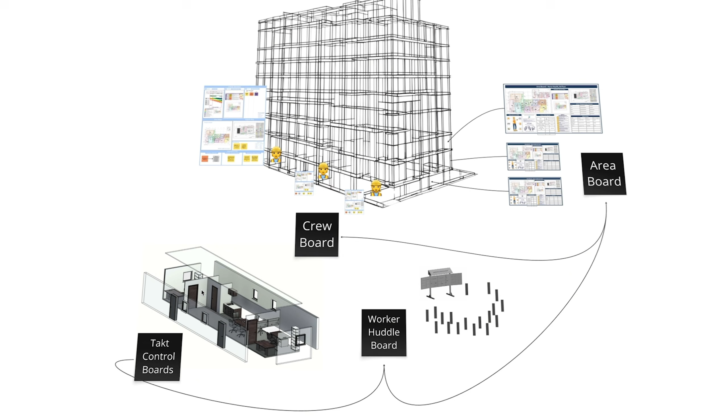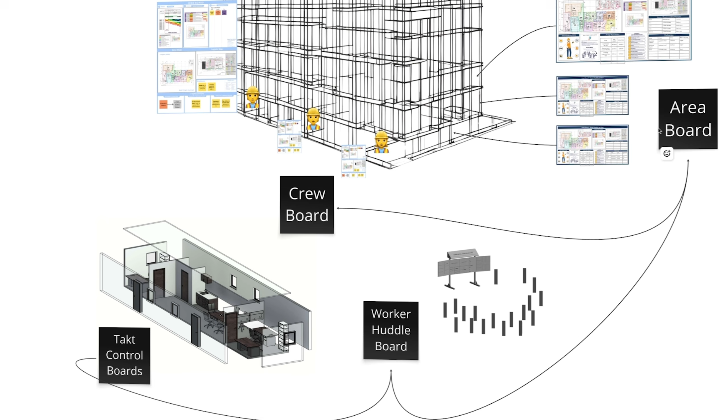But the bottom line is you will do your weekly team meeting, your strategic planning and procurement meeting, and then your trade partner weekly tactical right over here inside the office, and then the afternoon foreman huddle in the office. Then when you go to the morning worker huddle, you're out in the field, and then area boards communicate any information that you want to for that specific area, and then crew boards are for the crew. So I just want to make sure that everybody's still placed in the right meeting structure there and that we know what we're doing.

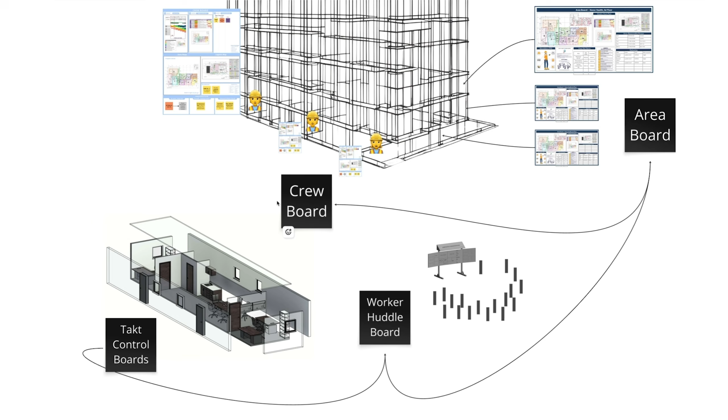The cool thing that I want to show you now is how the conference room is set up for that. And I don't like the single wide trailers. I hope we have at least a double wide or larger. But it does fit into single wide trailers, and we can help you out with that if you ever need it. But the bottom line is, for the conference room layout, I love to have on the left wall the part 1 coverage, team, and focus boards.

And then to have the part 2 flow and weekly work plan deliveries board. Then in the front to have your discuss and solve boards and your 2 screens up front. And then over here to the right, you can have your board, your pull planning area, and your agendas. And you'll see over here, we have the Trade Partner Weekly Tactical Agenda, just like I showed you before. But the bottom line here is you are going to use this in a very specific way. And actually, I'll go ahead and use this as a guide for us before I actually show you the Minecraft portion of it.

As we've talked about before and in other works, your Team Weekly Tactical will be where you balance and build the team. Then your Strategic Planning and Procurement meeting, that's where you're going to be reviewing your macro level takt plan and making sure your procurement is aligned. And just an FYI, the InTakt application now has a procurement log for you to do that. And we're in the Trade Partner Weekly Tactical, where we're going to make sure that we have a weekly work plan and look ahead planning out ahead.

And so this will enable us then to go do the foreman daily huddle where we're planning every day, and then will give us the ability to communicate to the workers in the morning worker huddle. So that's really crucial for me to make sure that we have the right cadence and that we're flowing the right things in the right order all the way to the foreman and to the crews.

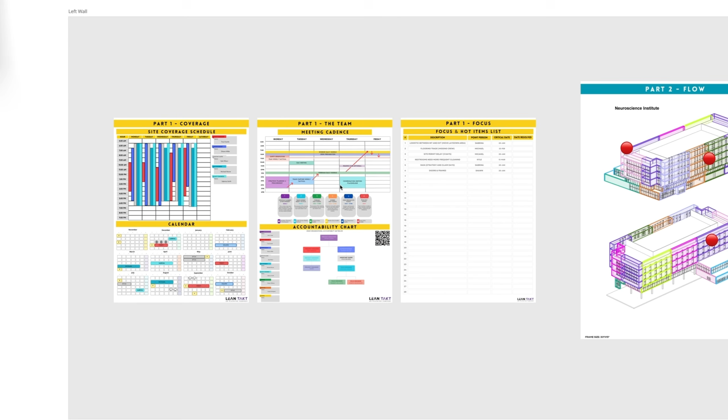And what you'll do here as a part of the meeting, just like we talked about before, is before the meeting even starts, you'll come over here to your boards to the left. If you've already planned your team for the week, you'll have your trade partners, your foremen, or you'll ask them nicely to put up red magnets on the boards for any problems that they're experiencing, any roadblocks. And these roadblocks will become the bulk of your agenda. You're going to solve roadblocks as the bulk of your agenda.

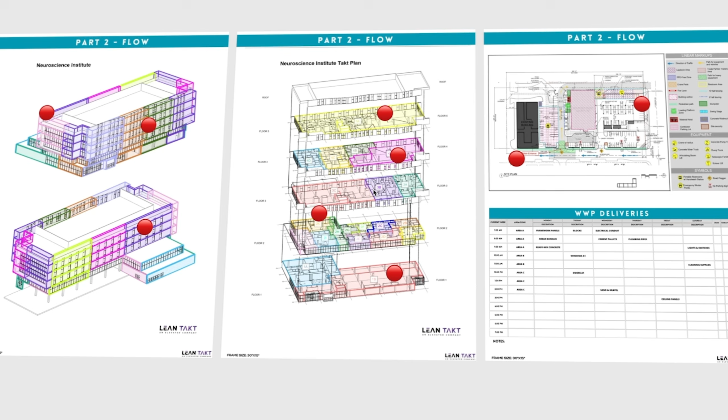But in your screens up at the front, you will do 2 specific things. And those 2 specific things deal with your look ahead and your weekly work plan. So when you're in here in the software, you can either bring up, like I talked to you about before, the look ahead and do this with them, or have them in front of printouts. You can actually print these out for them, which I actually prefer.

And what you're going to do is set a timer, I would say probably 5 or 10 minutes, and say, hey, I would like each of you trade partners, this is the work that you've already coordinated in the pull plan. Please go ahead and take all of your activities and make sure that you're ready all the way to 6 weeks out, and that you have the needed items. And if you don't, and there's something wrong in the next 6 weeks that will not prepare that activity, we can turn that into a roadblock.

And one of the cool things that I like to do is to have this specific page up on one of the screens or the board or the wall, or you can actually tape them down to each seat on the table. And you're going to say, these 17 things are required for each of your activities. And if each of these 17 things are not on track, then we have a problem, and that will be a roadblock that we'll want to identify and fix.

The second thing that you'll do inside that Trade Partner Weekly Tactical is go ahead and make sure that the weekly work plan is fully coordinated. Now, as you go through this and you have each trade talk to their activities, or you talk through them and ask them if they're ready, however you want to run the meeting, if there are adjustments, then you can simply just pop out of here and then go into the specific activities and make adjustments.

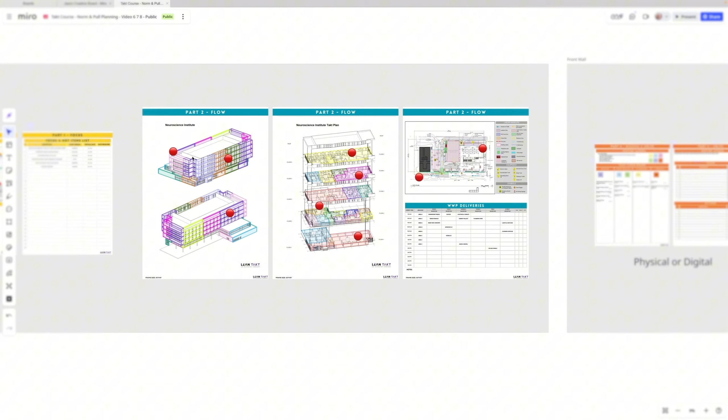I do want to say that you have the agenda here. Remember, shoutouts, lightning round, safety topic, review the takt plan, last week, current progress, weekly work plan, look ahead, and then you're going to solve any of those roadblocks that we talked about, right? Anything that came up through that process or that the trades already brought to the meeting ahead of time, you'll go through these one by one because you already have magnets and you'll solve those.

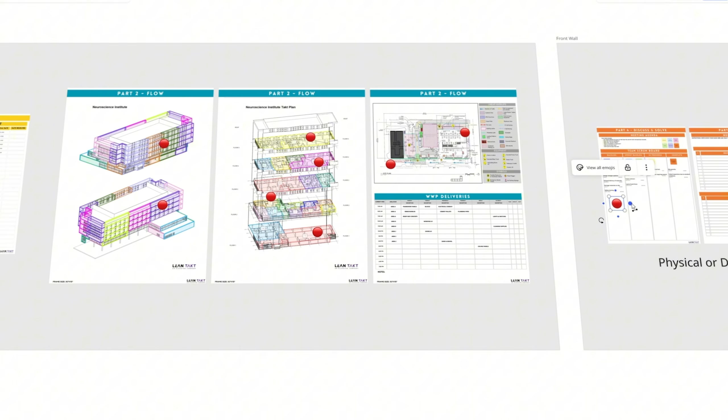Now, if you and the foreman are able to solve those, fine, just get rid of the magnet. But if this is a problem that you and the foreman can't solve, that issue is going to come over here, and it's either going to be listed as an item for the foreman to solve, right? Or it will become a part of the team Scrum board where your project delivery team will help you to remove that roadblock.

Okay, let me take you through some of the cool content over here that we have prepared for you. We've gone ahead and exported this out from the book. Just know that we're freezing this in time. We are constantly updating the books, but this is frozen in time. Let me talk about these different tools that I just referenced.

Okay, so when we go ahead and review last week, here's the point that I want to make. We need to know how we're trending, and so we need to look at the week before the current week. So this is where we are right now. This last week, if we didn't hit some of these items, we need to make sure that we're looking at those variances and those root causes and making sure that we are taking any lessons learned forward. And once we have those root causes, we can start to do things differently.

And remember, this weekly work plan thing is a little bit weird because, well, it's not weird, it's just how it is, but the last week is the week before, the current week is the week that you're in and you're executing, and the next week is the week that you're planning. So I just want to make sure that that's 100% understood and accurate.

And so what you'll want to do is review current progress, and that means now that you've already reviewed last week and you've looked at anything that you didn't accomplish, the variance, the root causes, and any activities that maybe need to roll forward, then you're going to look at the current week. Remember, you're right here. And you're going to see how we're trending this week, if there's any corrections that are needed for the rest of the week, and do we need to anticipate moving anything into next week, and are there any root causes that will affect the decisions that we're making for next week? Okay, so hopefully that's pretty clear for us.